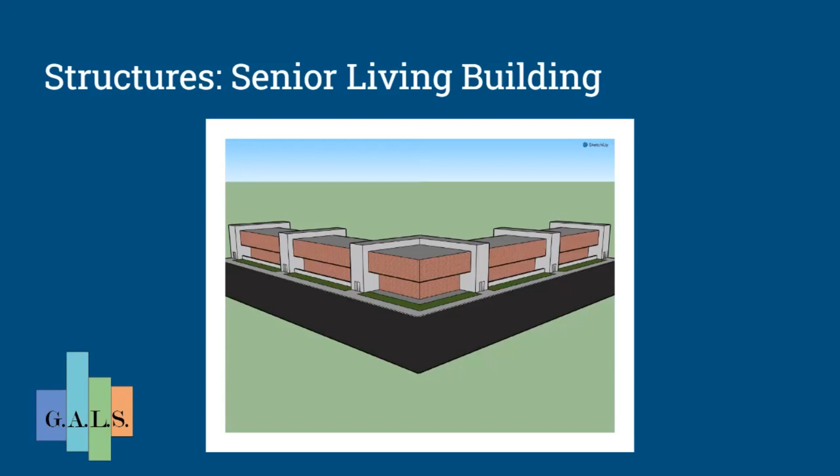So here is a preliminary design of what the senior living building might look like. As you can see, the second floor is offset slightly. This provides the covered outdoor space that was required, and it also provides a balcony on the back end of the building for the residents of the second floor.

So the typical floor plan here has 24 units, 30 by 30 each. We have selected this as our only layout for the residential building. We decided to do this to maximize accessibility. Since it's senior citizens living here, we want to make parking as close as possible and allow for the least amount of walking distance to each residence.

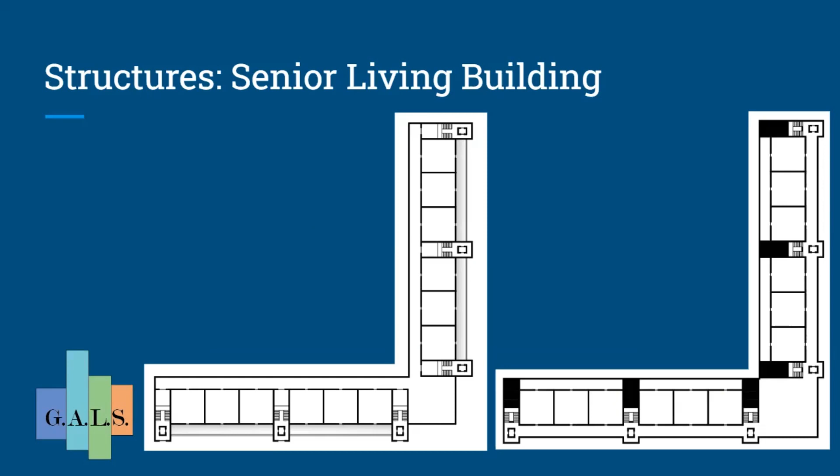So going into the structural components of this, we've selected different materials. The first one being timber. Each of these would be the base spacing with columns, then beams and girders. We've assumed that a typical spacing for timber material would be around 15 to 20 feet. This can pose some issues considering we might have columns in between that doesn't quite work well with the floor plan, so that would have to be taken into consideration as to whether or not we want to select this as an alternative.

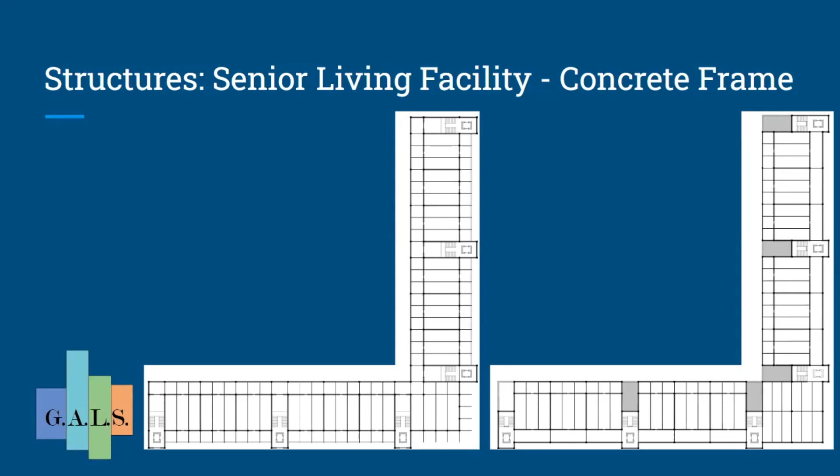Another material we've selected as a possibility is concrete. As you can see, we have slightly longer spans. This can span our 30 by 30 rooms much more easily. Some of the larger areas would still require extra columns, but it's still a possibility.

And then finally, steel, with a longer span, we've decided based on the depth of the beam. I ran a preliminary calculation for a concrete beam, and based on some assumed loads it would give us too tall a beam for longer concrete spans. So that's why we selected steel as our longest span option.

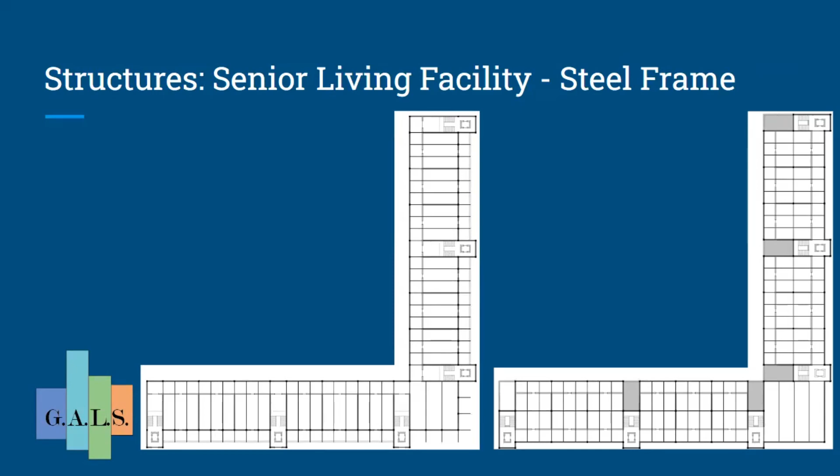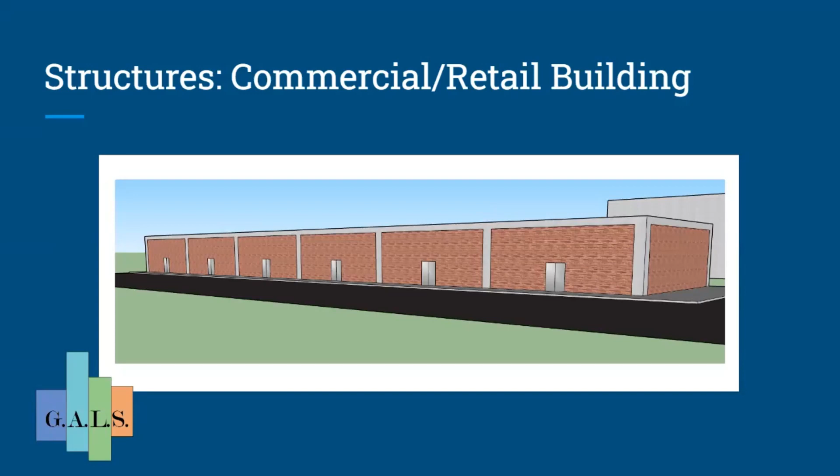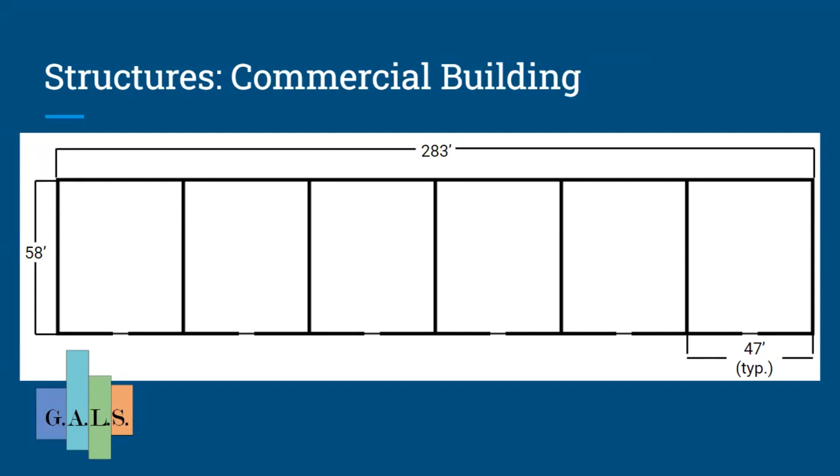In a similar manner, we have our commercial building. This will be a single-story building. The layout has already been decided, and we're just going to consider different materials. This is the typical floor plan: a 58 by 47 foot unit, with 6 units, giving us the 16,000 square feet that's required.

The first option would be a concrete structure. This would also require some columns in the middle just to meet the span requirements, which could potentially cause issues depending on who owns the space and how they would want to lay it out.

There's also steel, which gives us longer spans. And then finally we have masonry as an option, where these walls would be load bearing, and then steel joists would support the load of the roof.

So for our future work, we need to select the alternatives and then determine the load distributions based on occupancy use, whether it's residential living or a corridor walkway, since each would have a different load distribution. Based on those load distributions, we have to design the structural materials and the corresponding span lengths and column spacings. Once those are done, we can design the foundations, and after it's all said and done, we can put together a cost analysis.

So I'm going to hand it over to Roberto, who's going to talk about the northern half of our transportation.

As one of the two transportation engineers, I was tasked with developing a new road that would connect Sturdy Road and Silhavy Road while allowing for pedestrian facilities.

Alongside, I would have to redesign the existing intersections at Sturdy and Silhavy. Additionally, I was to develop a new parking lot for the new development that my comrade here was to be designing.

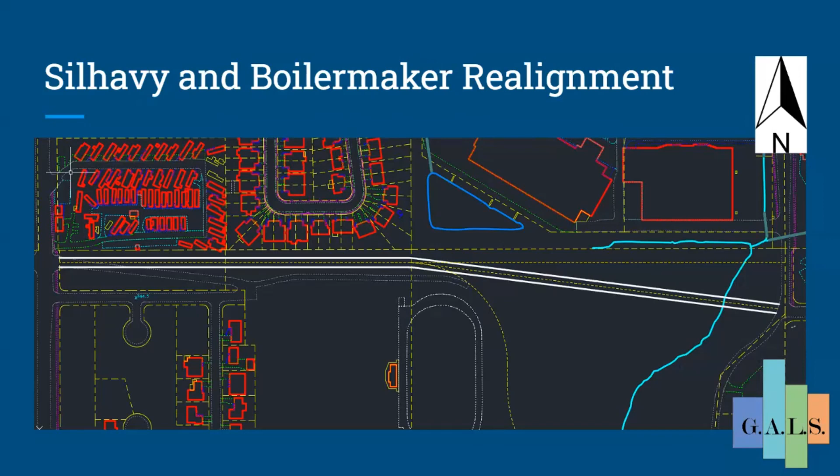This is a picture of the site just east of Valparaiso University. This is my alternative 1, a simpler alternative allowing for a connection at the already existing intersection at Boilermaker Court on Silhavy Road. Alternative 2 is a much simpler alternative, allowing for a perpendicular intersection at Sturdy Road and a perpendicular connection at Silhavy Road.

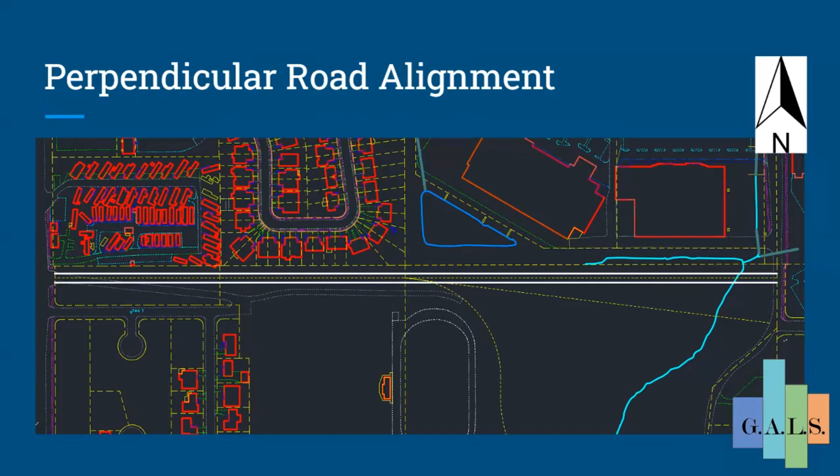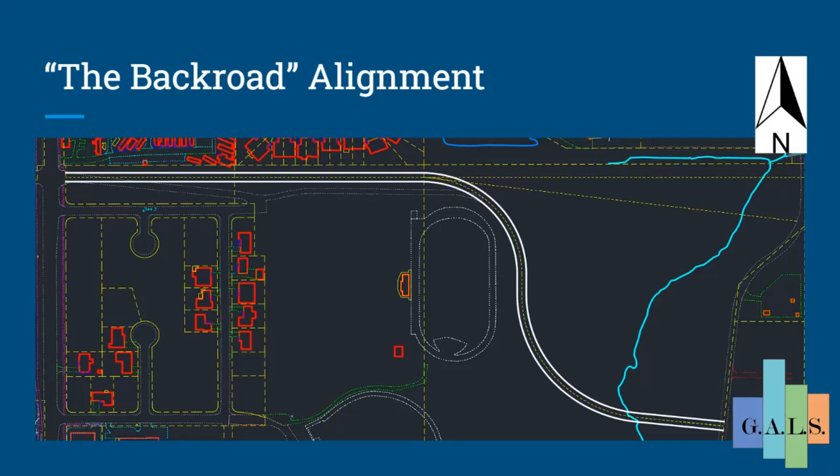Alternative 3 is more of a wavy road, but it would allow for more space, more breathing room for the vehicles coming in from the northern section of Silhavy, the Menards and the shopping centers and whatnot, coming southbound from the northern portion of Silhavy.

These are my 3 intersection design alternatives. I went with a signalized, a roundabout, and a 2-way stop intersection. The roundabout would just make things much simpler and allow for a more smoother transition between road to intersection to road. The 2-way stop is essentially what is already there with the addition of the new road.

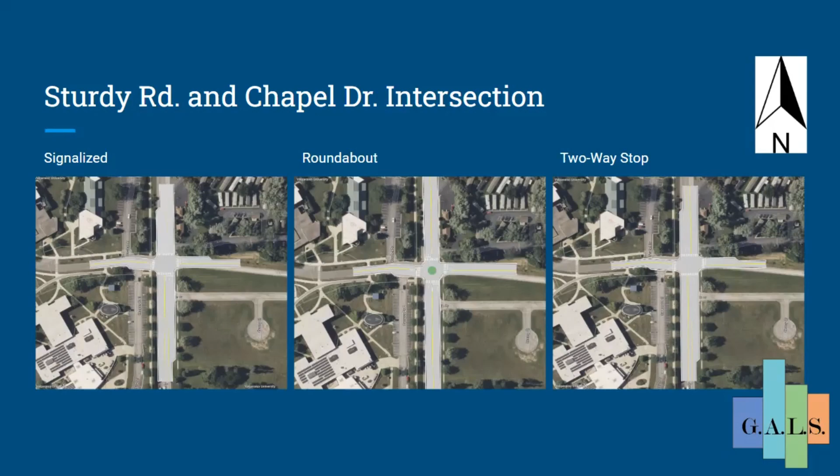At Silhavy and Boilermaker Court, I went with the same 3 different alternatives with the addition of extra facilities on the eastbound road due to the awkward angle that the road meets the new intersection.

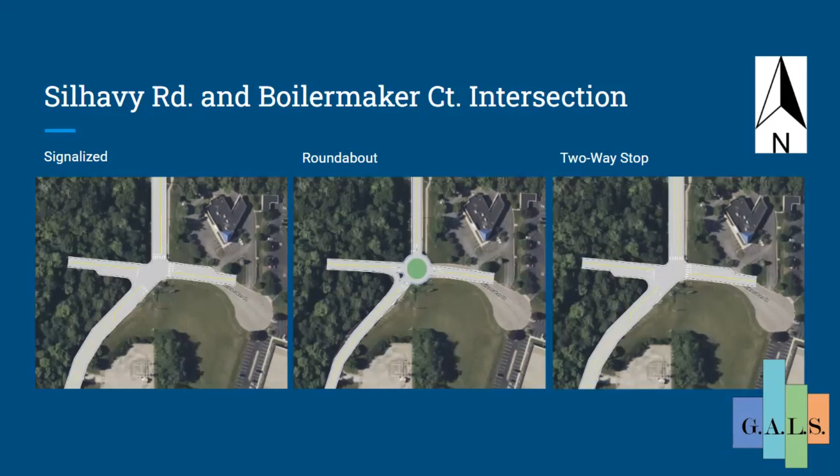It was determined that for the assisted living, it was required 1.5 spaces per every dwelling unit. And as the assisted living space has 24 living units, it was required a minimum of 36 parking spaces.

As for the retail building, we required 5 spaces per 1,000 square foot. The building is 16,000 square foot, so that is a minimum of 80 parking spaces. And we are required a minimum of 2 and 4 disabled parking spaces respectively.

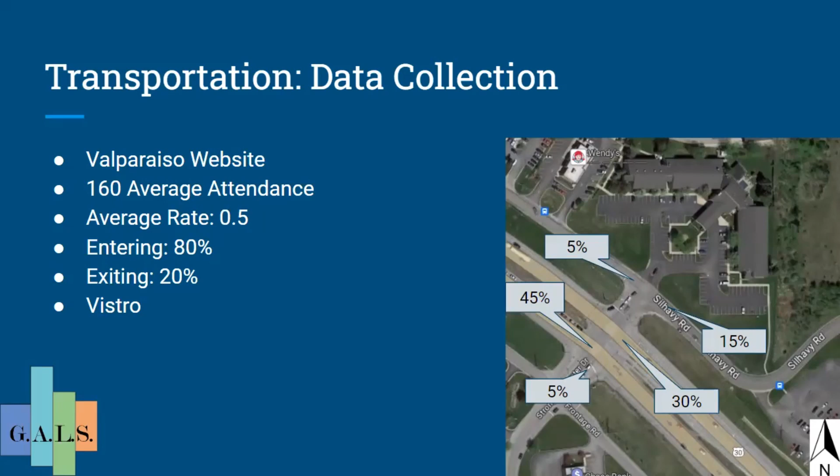I decided to use an 80-20 ratio. There actually is no traffic impact study on baseball fields in the traffic impact study, so this is a best estimate guess that I thought would best fit our scenario.

From here, I ran the traffic impact study with Vistro. As you can see, I got a level of service of B before, and then after existing, I got a level of service of C.

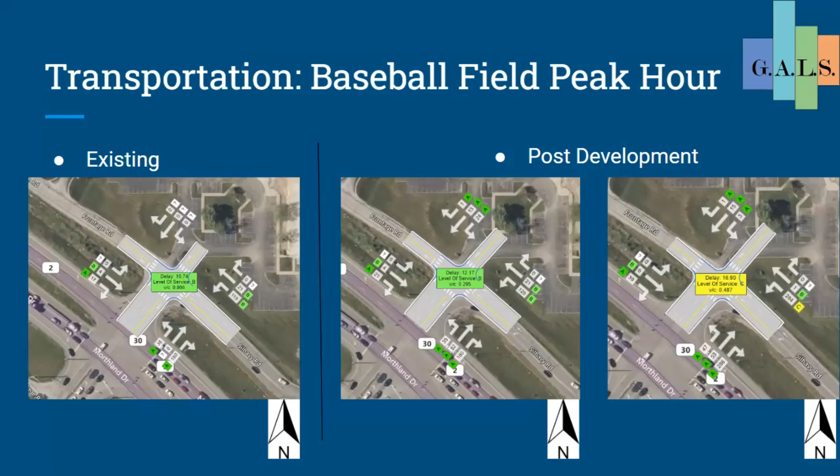Now, for my first alternative, I decided to use a signalized intersection. I did this because the previous intersections before this are all signalized. So the intersection going into Walmart is signalized, and I thought that it would be best fit that everything would run smoothly if they are all the same.

I ran with Vistro and I got level of services both with A. They're all 12-foot lanes with 20-foot radiuses.

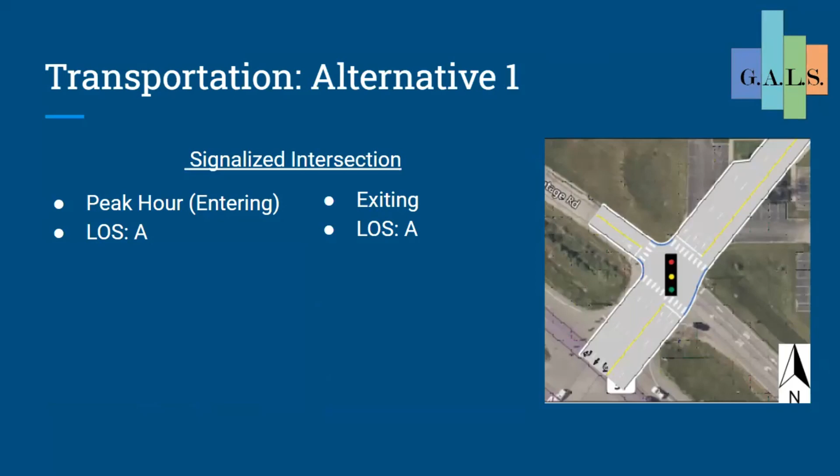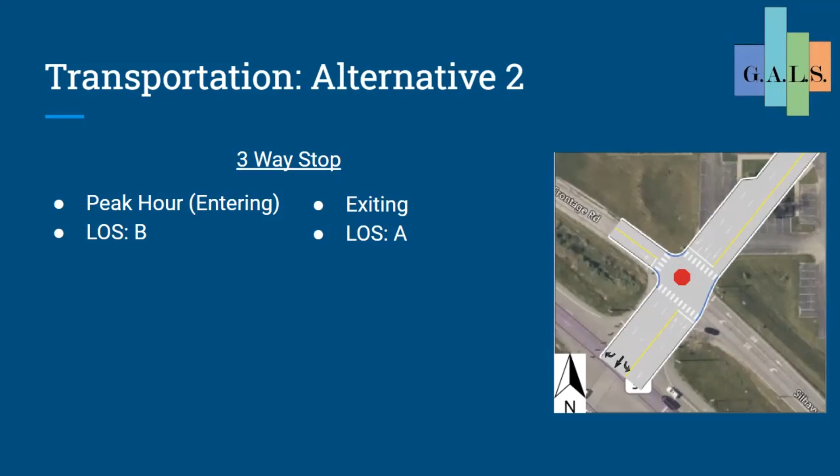Here, my second alternative is a three-way stop. As you can see, I have a level of service of B during the peak hour. However, it's interesting that the exiting is a level of service of A. This is because during baseball games, they typically end around like 9 o'clock, and that's out of the peak hour, so there's less people driving to and fro to stores, allowing for an easier exiting.

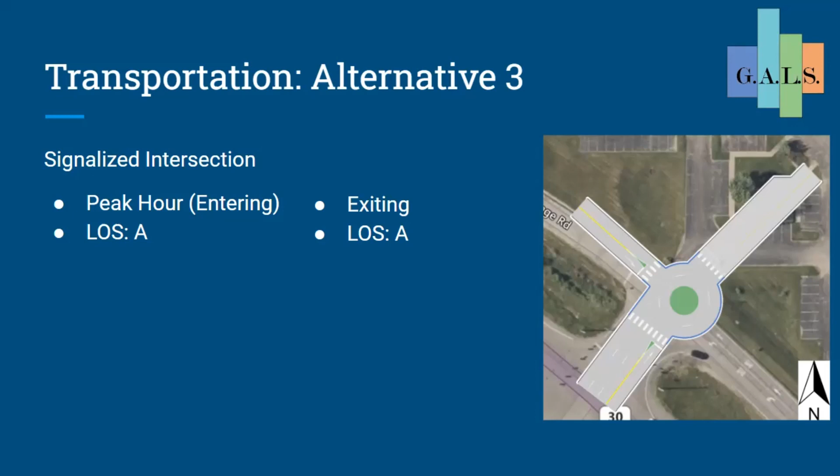Here in alternative 3, I decided to use a roundabout. I decided to try this because it's safer for the environment, less accidents are proven in the studies. So I decided to run this using Vistro. I got level of services with A for both entering and exiting.

It was 1 space for every 4 feet of bleacher. I counted 450 feet of bleachers, so 112 and a half spots, so 113 spots.

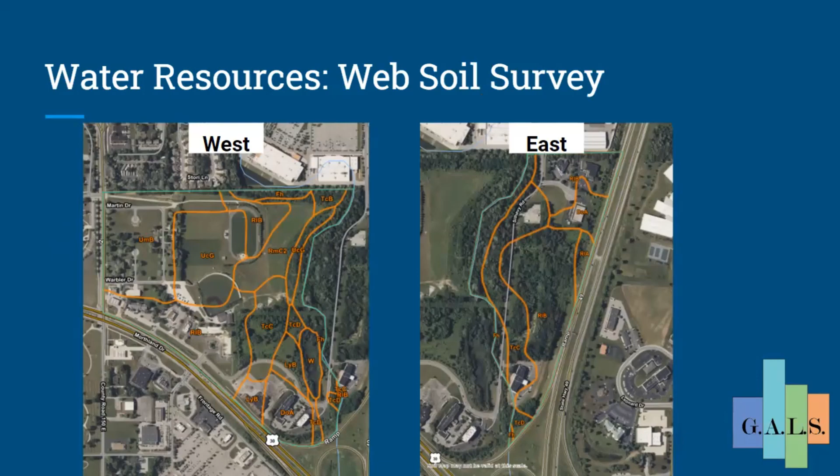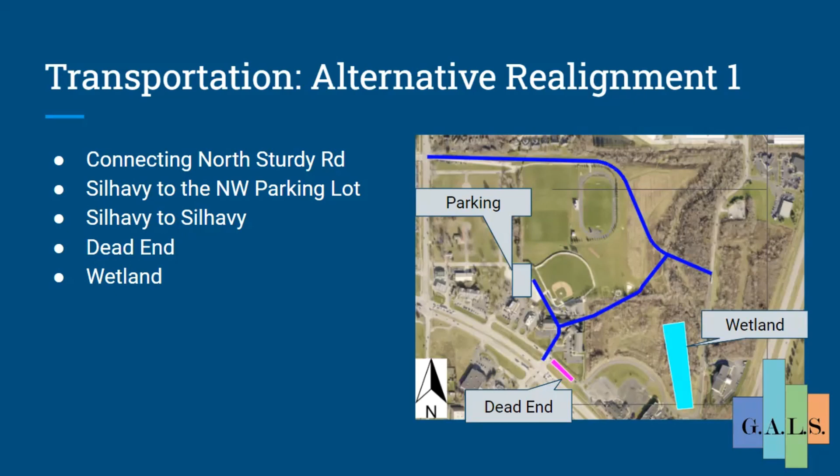Will do. Thank you. Forward or backwards or?

I did, I just didn't include them in the presentation. I have them in a spreadsheet on my computer right now. Off the top of my head, I do not. I apologize for that. I could meet with you later and show you those if you would like, though.

2 lots then, and it was a consideration. But when speaking with the water resource, it was determined that it would be a simpler idea to have 1 lot. But it hasn't exactly been struck out, the idea hasn't been eliminated, I suppose.

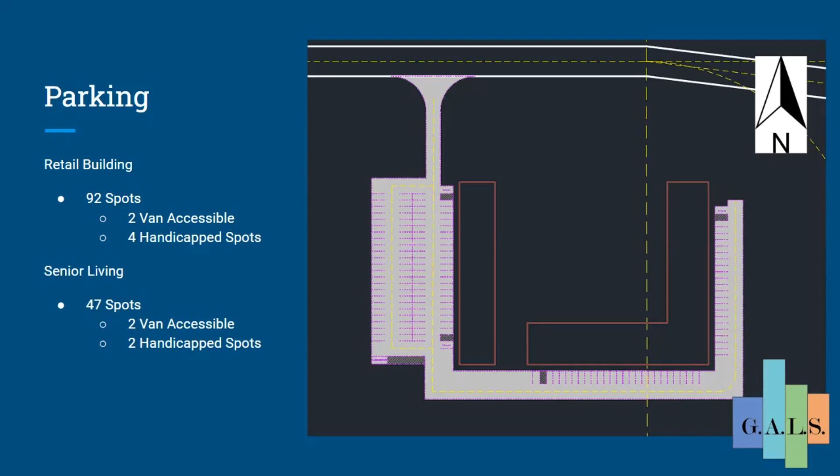It was 30 degrees, but let's see here. I guess I can go here. So your question is more about why I decided to go with angled parking and parallel parking. My thought process on that was just to have more bang for your buck, essentially, so you're going to have more parking spaces in the same area. That's why.